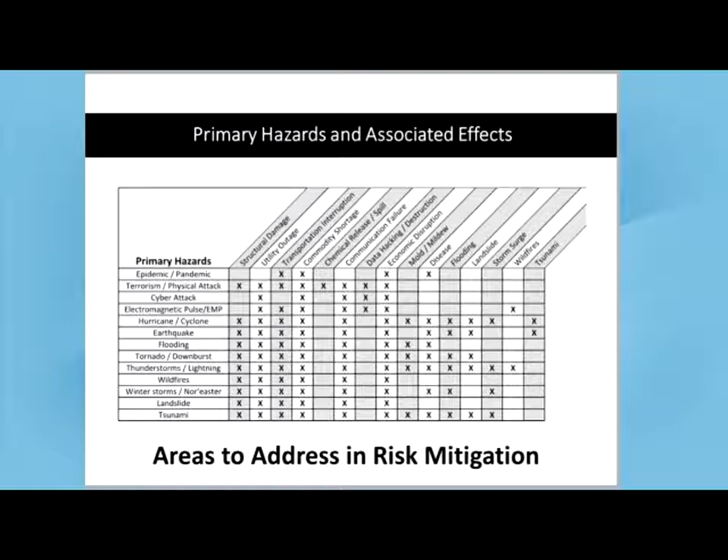This chart reflects a number of primary hazards, along with the multiple effects associated with same, as you can see across the top. Irrespective of the primary event, one can easily see that there's numerous effects to be considered, and thus addressed in resiliency planning and risk mitigation. They cover a broad gamut from physical destruction to utility interruption, environmental damage to economic disruption, data destruction to disease. Identifying and assessing these effects or risk is a critical part of any company's emergency program.

Let's briefly look at some specific incidents over the past few years. Currently, the entire nation, but especially the healthcare industry, is dealing with COVID-19. Before that, we had SARS, H1N1, Ebola, and AIDS. In early March of this year, Nashville experienced devastating tornadoes, with similar ones hitting Mississippi and Georgia last week, and even last night in Texas and Oklahoma. California deals with wildfires every year, including the notorious 2018 Camp wildfire. We understand that in today's political environment, with various religious and ethnic tensions, there exists a climate for terror attacks.

While we often hear of cyber attacks, numerous utility companies continue to report they have annual increases in their attacks on their control and SCADA systems. And finally, the Amtrak derailment in 2017, where a train was traveling at 80 miles per hour around a 30-mile-per-hour curve, reflected that even with supposed fail-safe mechanisms, there could still be tragic accidents, often causing loss of human lives.

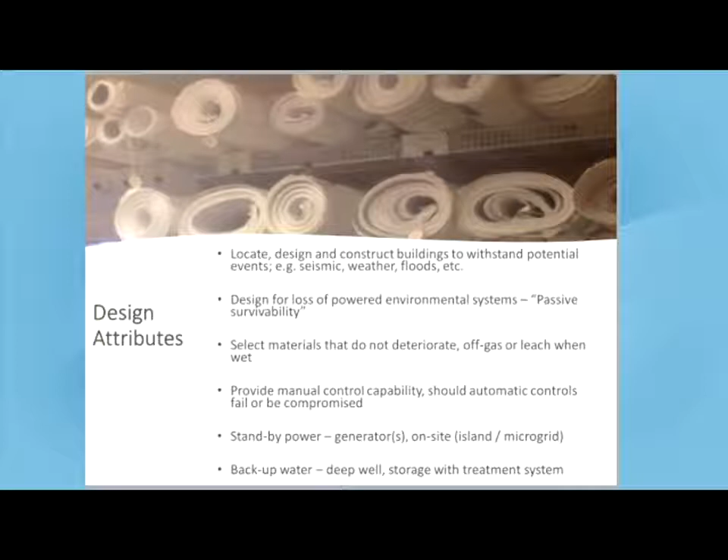Does one relocate to another facility or location, or plan to bring in a portable generator or fuel? And then finally, recovery mechanisms. Many utilities have developed restoration agreements whereby they share resources, materials, crews, etc. in times of severe events. And then finally, what is the required recovery time?

So GBCI offers four resilience rating systems in addition to the LEED system, which we're all familiar with.

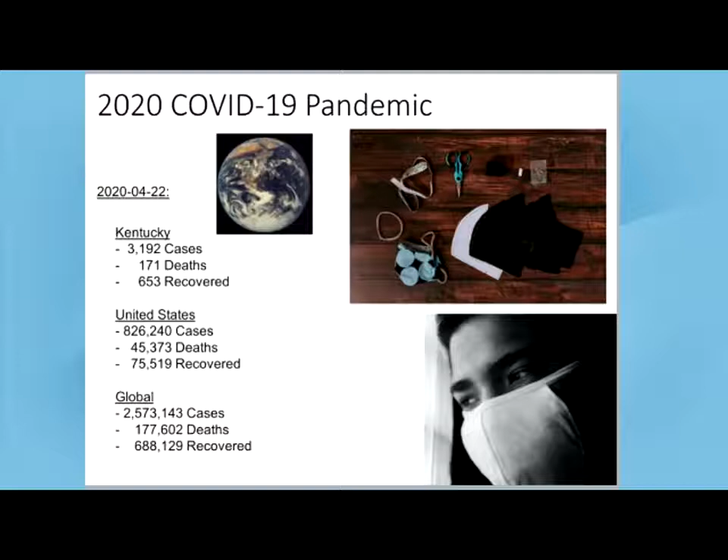While we monitor the news and the number of cases, we hear questions regarding lack of preparedness. Where were the stockpiles of masks and ventilators? How has this disrupted the supply chain, and what could have been done to anticipate this? The federal and state governments have appointed task forces to address logistics, but they're operating in a reactive mode. Where was the proactive planning?

We've been issued new rules under which to live and work. However, these have evolved over the last several weeks. Often, states' orders have varied, instituted and/or extended on different dates, but based upon what? Evolving information fed from what appears to be defective models and questionable data from countries around the world. Again, where was the upfront planning?

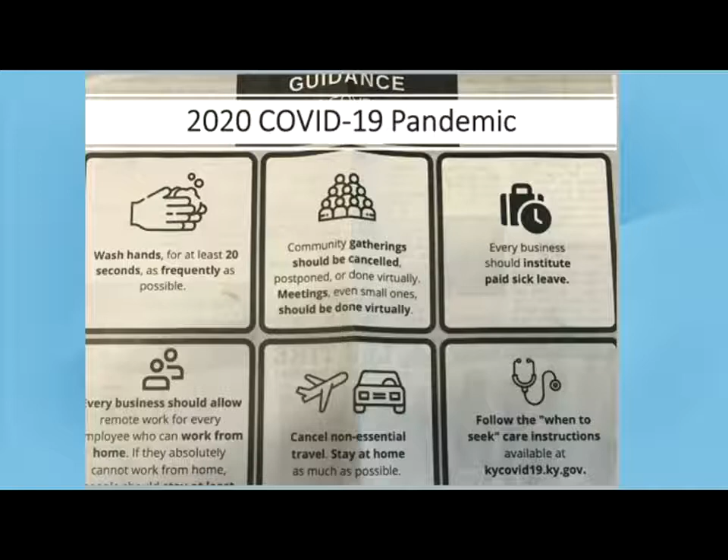Was a complete quarantine lockdown required for everyone? These are the questions that continue to be asked, and it appears to show a lack of resiliency, a lack of planning.

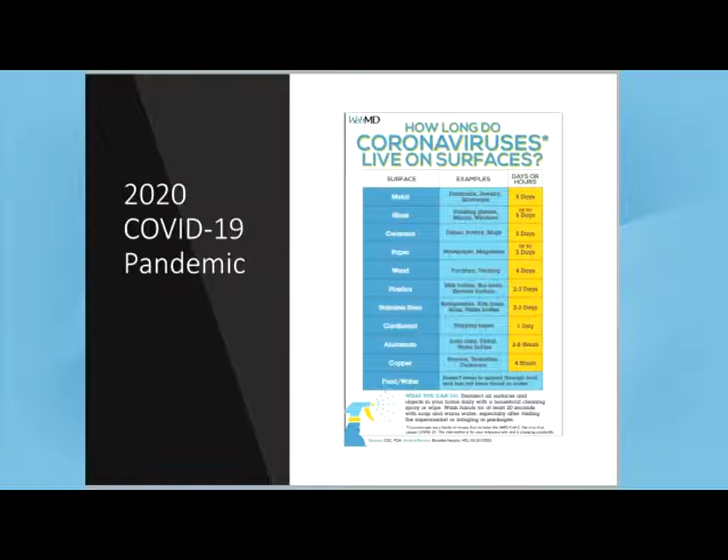We know that there are many stainless steel tables and equipment in healthcare being disinfected on a continuous basis. The chart also says it doesn't seem to spread through food or water, but what happens with respect to individuals touching packaging or produce at grocery stores? Again, a number of questions, and there are still people out there trying to answer some of these.

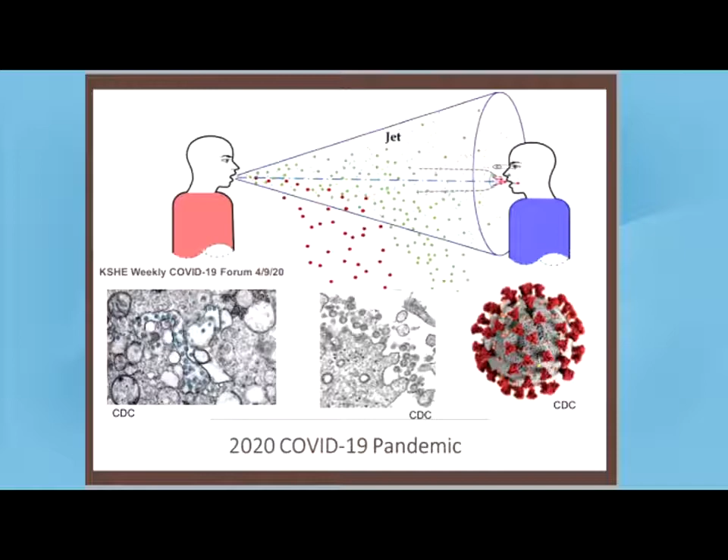Of course, Bob is showing the germ that we're trying to protect people from. One of the big tools in healthcare facilities is the 3M N95 mask, but an issue that has really arisen in the shortages and lack of previous stockpiling is the alarming number of counterfeit masks on the market.

These masks have authenticity numbers, and it's very important that hospitals have databases and the ability to use software to interconnect with the supply chain so that they can verify authenticity numbers.

This issue got even more complicated when the federal government reversed its decision due to supply shortages and are now allowing KN95 masks from China, which have an even larger set of counterfeit complexities and a greater need to look at authenticity numbers not only in the United States, but across the world.

This is why industrial platforms are crucial in helping to solve these problems. Stockpile allocation systems have been turned on their end with this issue. For example, in the state of Kentucky, we've had to migrate to the WebEOC software in order to keep up with the demands of allocating resources effectively.

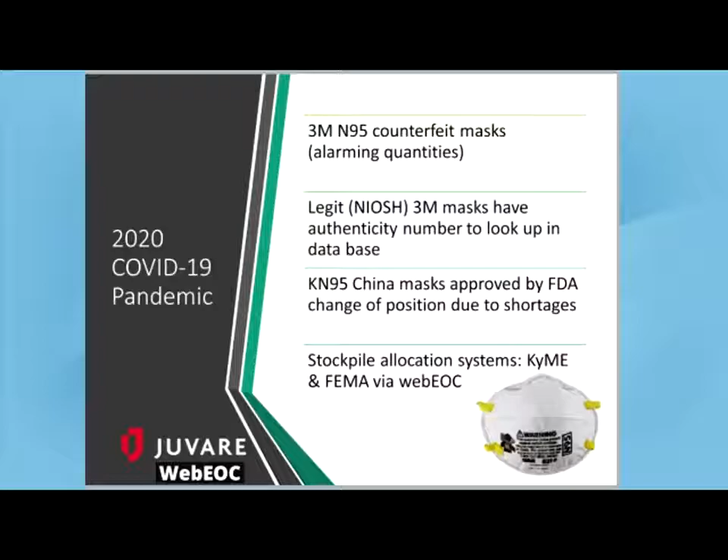There's been a lot of ingenuity associated with the COVID case and a lot of hard work by engineers. At Johns Hopkins, they developed 3D printed splitters in case ventilators needed to be shared between patients, which hasn't really come to. In the early days of this COVID-19 crisis, Smith Seckman Reid, an ACG member, put a one-page checklist into the hands of hospitals in Kentucky and other states.

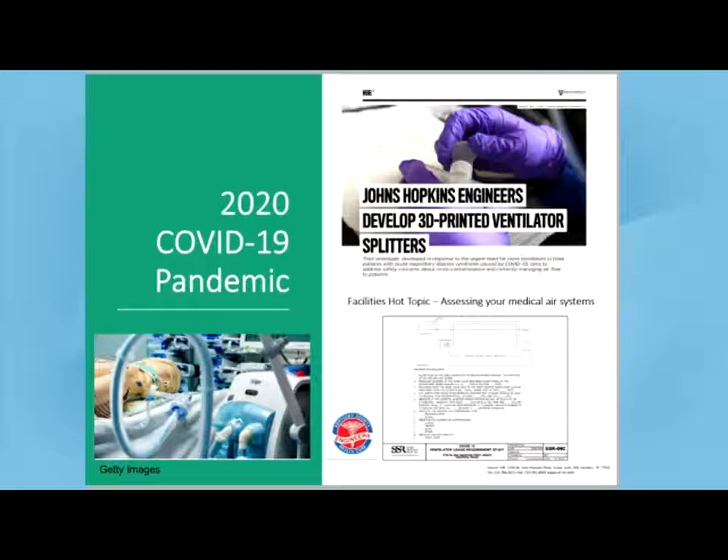This checklist really helped them to assess their medical air system, because it's one thing to buy or supply ventilators, and another thing to have the medical air systems on your head wall that can support them.

Surge planning is extremely important when you talk about medical gas systems and ventilators. Do you have the fittings on hand to accommodate new equipment? Do you have the bulk oxygen supply zones understood to where you can pick zones closer to the supply with the largest pipe sizes and the shortest pipe runs?

Each ventilator has its own continuous flow requirements and lowest operating pressures, and this is incredibly important to know so that you don't overtax your system.

Mainline pressures are normally set at a 55 PSI max, but with added ventilators, we've had to work at the max, which causes a lot of nuisance alarms. So alarms are recommended to be set 20% high at about 66 PSIG in order to prevent so many of these nuisance alarms.

You need to do hour-by-hour monitoring of these medical gas systems because the vaporizers can freeze when they're running a lot of volume, and you might have to put fans outdoors to try to get some of that icing off the equipment. Bulk oxygen tank and evaporator capacity could really be the weak link.

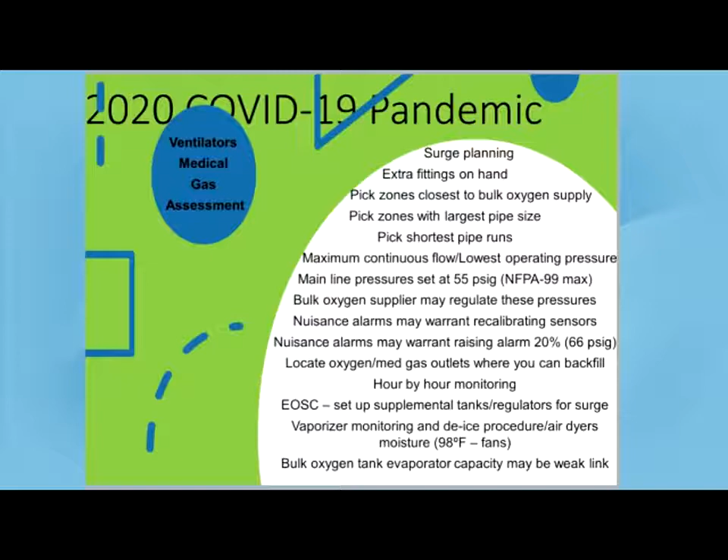Filters are another issue. I think the number one thing to understand is air exchange rates are the greatest HVAC tool in order to prevent infection, and that's basically 6 to 12 air changes per hour to be effective.

Fortunately, the viruses are suspended in mucus, which catches about 90% of the problem, but that still leaves 10%. So you have to use strategies.

One of the things is that we're needing more isolation rooms, so we're bringing in air cleaning machines with HEPA filters so that we're not discharging virus-laden air directly into the atmosphere.

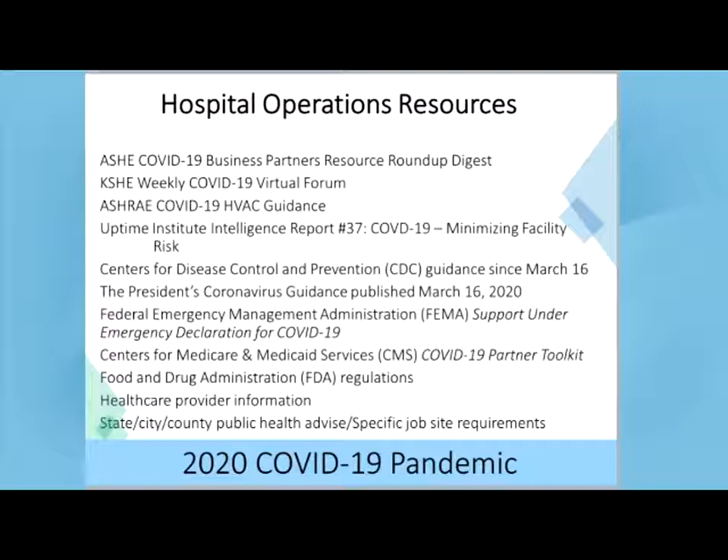There are a lot of resources out there. This is a list, and when the slides get published, you'll have access to it too. Through KSHE and other associations, we've been looking at all these different resources to try to support our clients in healthcare, pharmaceutical, and data center industries.

The American Society of Heating, Refrigerating and Air-Conditioning Engineers, ASHRAE, created a site with a variety of resources for COVID-19. These include interim guidance from the CDC, guidance from the World Health Organization, and lists of various ASHRAE standards, guidelines, and position documents.

Their current recommendations include disabling demand control ventilation and increasing outdoor air ventilation within the constraints of temperature control and ambient air pollution. Additional recommendations include sealing the edge of filter racks and upgrading filtration. They also recommend operating HVAC systems 24/7 and considering the use of UV lights coupled with filtration.

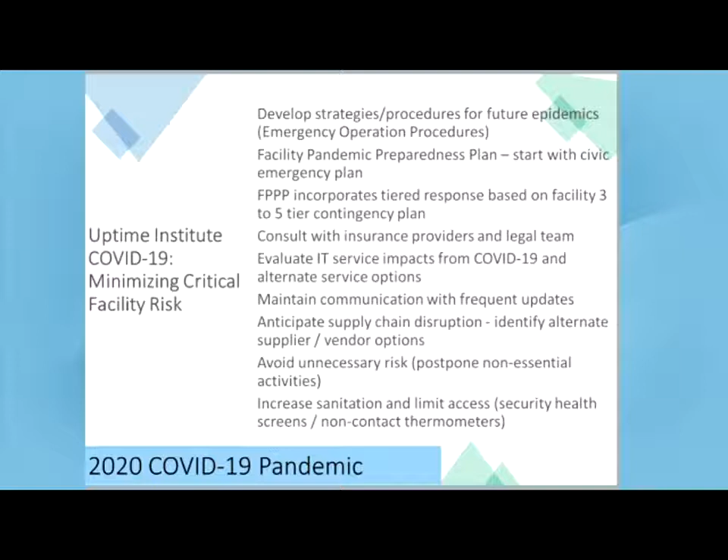Understanding the critical nature of communication and data access for all mission critical facilities, including both healthcare and first responding agencies, the Uptime Institute recommends that its members test their networks to confirm the higher volume expected with numerous personnel working remotely and connecting through VPNs.

They also recommend any unnecessary maintenance or construction projects be temporarily postponed to avoid potential interruptions of service. One of the issues that appears to make data centers a little bit more vulnerable rests with the average age of the operating workforce, which in many cases exceeds 50 years of age.

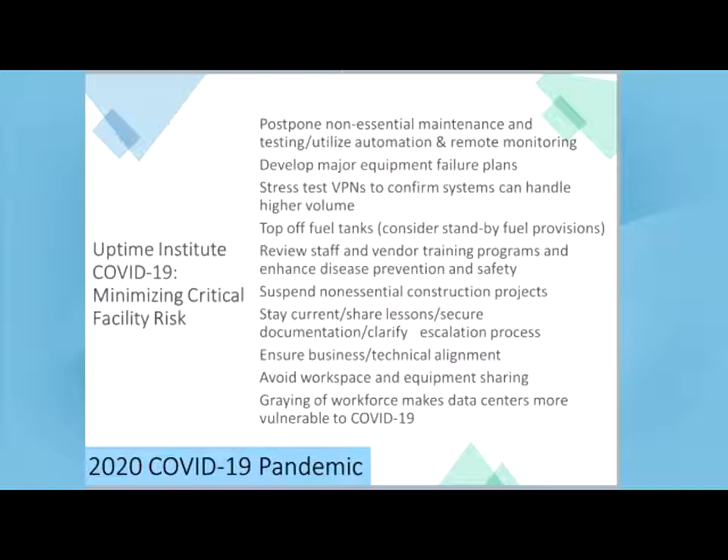In discussing resiliency metrics, the Uptime Institute, quite a while back, developed a series of 4 tier levels to rank data centers based upon their reliability and resiliency. These examine potential single points of failure, annual downtime caused by the site, and thus the representative site availability.

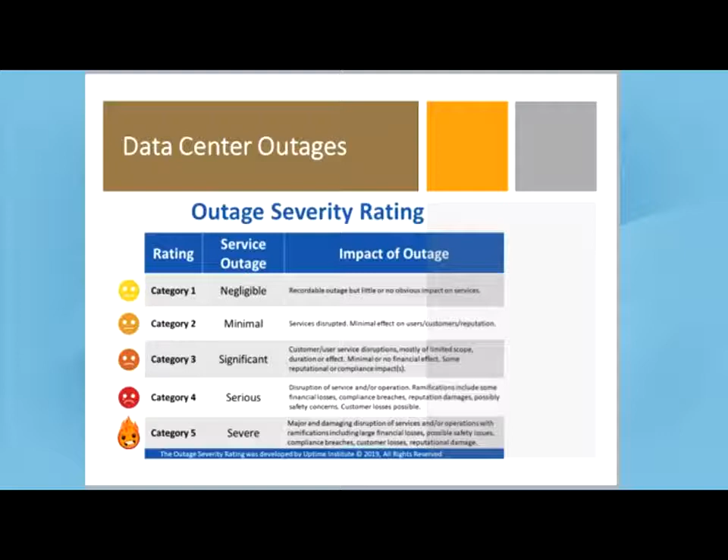Similarly, the Uptime Institute has developed a 5-category rating for the severity of service outages, rating them from negligible to severe based upon a number of factors, including financial effect, losses, reputation concerns, safety issues, and losses of customer data. Naturally, these disruptions have numerous consequences related to healthcare information, first responder information, and most importantly, online commerce.

More specifically, to reflect the economic numbers, Amazon Web Services had several outages in their Virginia data centers back in 2018 between March and June, including approximately a 6-hour outage during their annual Amazon Prime event.

With the increase in number, size, and complexity of new data centers, many serving the cloud, the number and average duration of outages has been increasing annually. Last year, the average cost of a data center incident was about $750,000, or roughly $11,000 per minute. The maximum outage cost could be millions of dollars.

This has only increased during this pandemic, when I hear recently that Amazon revenue numbers are in the range of $11,000 to $15,000 per second.

Another important aspect of our society is the cold chain. We need to avoid food spoilage and protect the food supply of our country. Resilience plays an important role in this, and this is also an area where we can see that resilience can be combined with normal operation. So it's not just a matter of outage, but it's also a matter of stability of your operating system.

We want to maintain the security of the food system from loss of power, from equipment malfunctions, which could include things like compressors, condensers, fans, pumps, electrical devices, and controls, as well as natural disasters. One of the big developments, and it has a lot to do with material property development, is the advent of thermal energy storage, which improves efficiency, minimizes fluctuation, and extends protection.

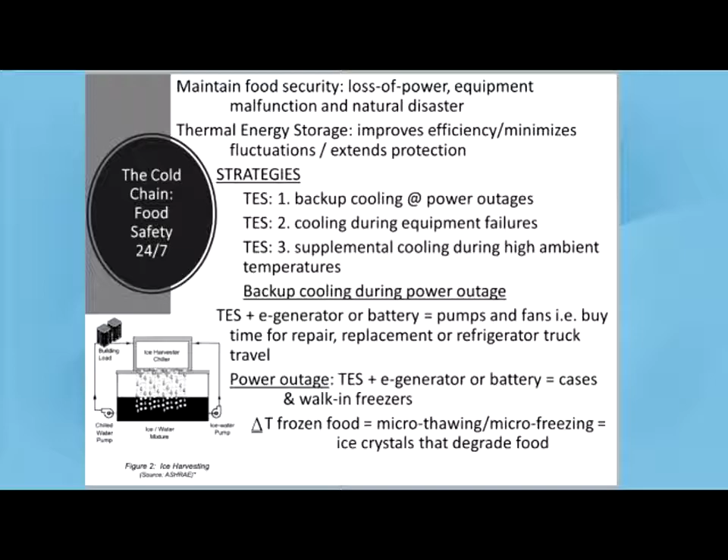Stability is key in this industry because frozen food is affected by fluctuations in temperature, which causes microthawing of the freezing particles, and those large ice crystals degrade the food, which is obviously not desired.

Thermal energy storage systems use latent heat and are 50 to 85% efficient. They consolidate heat near the top of a room where the refrigeration airflow occurs. There's also a strategy in the cold chain of shifting compressor runtime to nighttime.

25% less energy and improved temperature stability are known from applying thermal energy storage systems. We can combine this with phase change materials, intelligent controls, and load shifting and demand response to provide resilient, reliable, and normal operations.

I should point out too that the cold chain is crucial in maintaining our medical supplies. For example, vaccines typically have to be refrigerated. So resilience and reliability in the cold chain is extremely important.

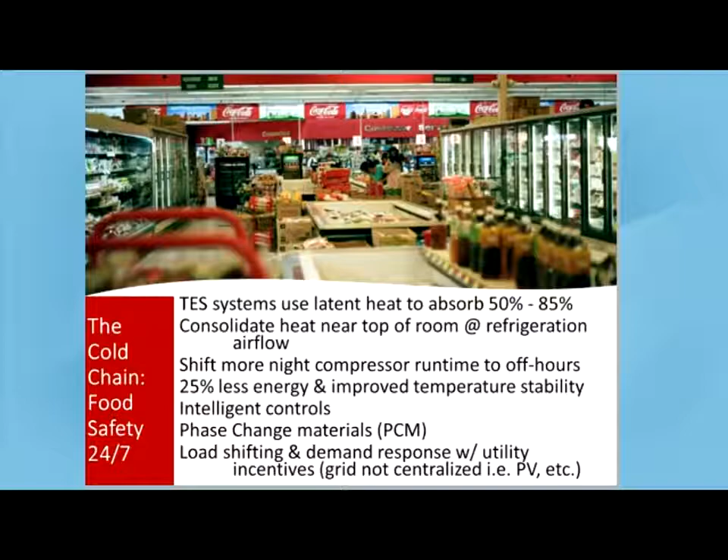When Bob and I conceived this presentation last year, my motivation was the Boeing 737 MAX. We saw the crashes that occurred that caused a lot of loss of human life. In fact, a total of 346 died in 2 crashes.

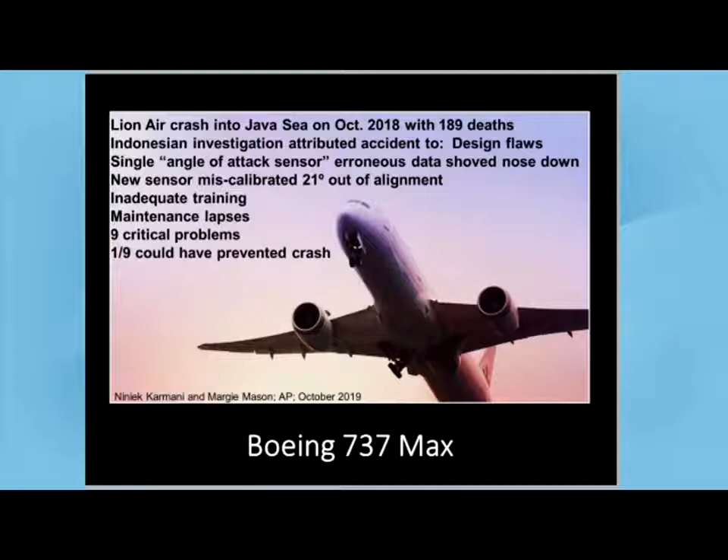There was the Lion Air crash over the Java Sea in 2018, and the Indonesian investigation attributed the accident to design flaws—a single angle of attack sensor reporting erroneous data shoved the nose downward and caused a 21-degree misalignment that contributed to the death. This was done at a maintenance operation prior to that flight, and it reflected inadequate training and maintenance lapses. Investigators said there were 9 critical problems, any one of which could have prevented the tragedy.

In March of 2019, this came to a head when a second plane crashed in the same way. That was the Ethiopian airliner that killed 157 people. The Ethiopian interim investigation report again cited design flaws.

They noted the unstable adjustable stabilizer and that the controlling software had flaws in it, and that those flaws were not relayed to the operations people—they were omitted in the O&M manuals. The rollout of controls to solve a mechanical problem in an aircraft provided a single solution with no real resilience, which led to tragedy.

The U.S. Committee on Transportation and Infrastructure cited that production pressures, a culture of concealment, and safety certification process irregularities were direct contributors to these tragedies.

Moving to a more pleasant subject, community-based resiliency at Alys Beach. There is a home program called Fortified that is considered the national standard for resilient construction, and it deals with homes in coastal regions affected by rising sea levels and floods and so forth.

The key is that there are first and second order environmental disaster impacts. First order are the obvious loss of life, displacement of people that comes from the immediate after-effect, and then the need for construction. But the second order impacts are also life-threatening in that they shut down social systems and make it hard to get healthcare providers where they need to go. It can close down businesses and devastate infrastructure.

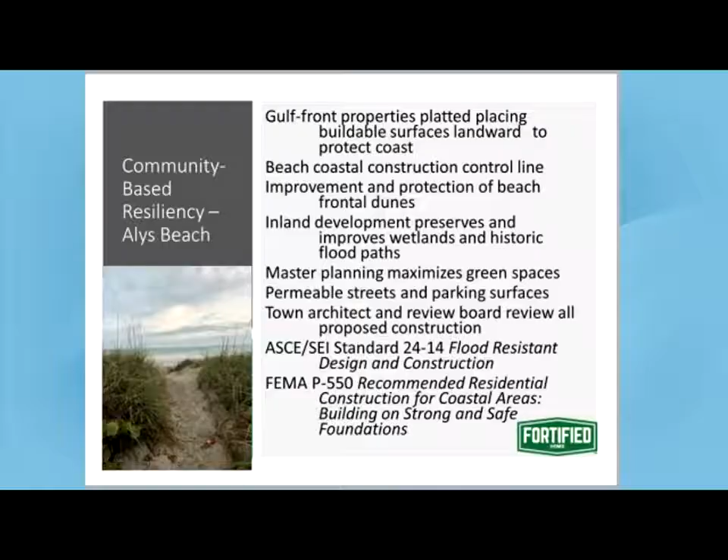Another thing that comes to light in this is severe duty louvers to improve resilience. Think of this in terms of hurricane prone areas like Florida, or anywhere on the coastlines of the country. These are heavy duty louvers that can resist high wind forces. They can also withstand hard impacts like missiles hitting them, big objects like bricks or pieces of wood.

Severe duty louvers also need to be considered in areas that aren't necessarily coastal. We had a project in Western Kentucky, in the middle of the state, where after turning the building over we were called back because there was ductwork collapse. The assumption was that a failure of the commissioning process led to a shut damper, but we went and retested and everything was working perfectly.

What we discovered was we had a minimum outside air intake on one corner of the building, and at a 90-degree angle was the main outside air intake. When we were economizing with the unit, a storm came, and that storm caused a pressure differential on the corner, and it imploded the entire ductwork for the return air system. This is a good example of considering resilience ahead of time when you know you're in an area susceptible to high storms and winds.

Getting back to facilities in general, and speaking about ASHRAE, they've taken a very proactive approach to resiliency in the design of their new global headquarters. A number of potential resilient measures were identified during development of the project's owner's project requirements, or current facility requirements, and were ranked as low, moderate, or high with respect to cost. Features listed here include passive survivability in case of a power outage to the environmental systems, standby generator, battery backup systems, impact-resistant windows, backup communications, and even redundant water supplies — again, a proactive approach for resiliency up front in the planning of this facility.

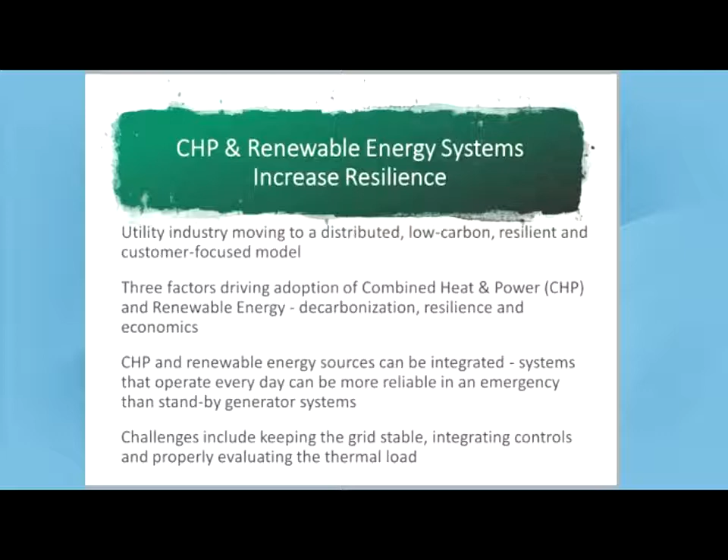As previously discussed, healthcare facilities, especially hospitals, have a high need for reliable and resilient power. These are especially good candidates for CHP and fuel cell systems, both of which provide electric and thermal energy. CHP, fuel cell, and even renewable energy systems, which operate year-round, are viewed as more reliable than standby generators, which may only be exercised periodically and only run during emergencies. Fuel cells convert chemical energy from hydrogen-rich fuels to electric power and heat. These can both use natural gas or clean renewable biogas, and both systems are seen as reducing emissions and enhancing environmental sustainability.

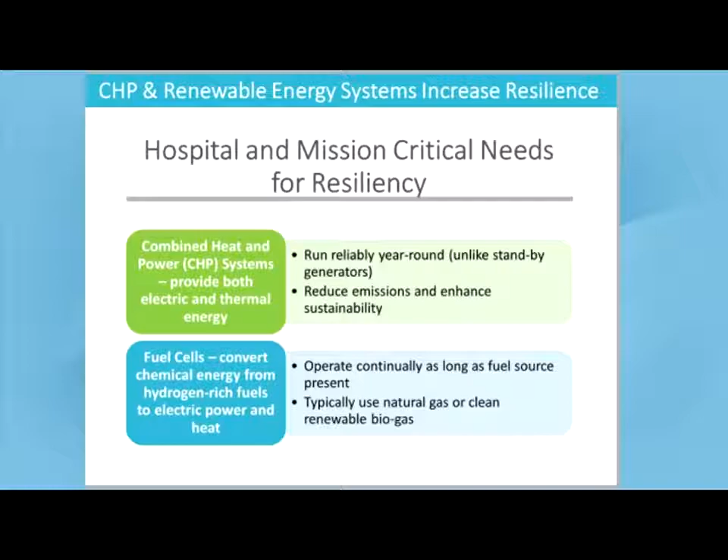Retrofits should also be considered in terms of resilience. These facts are very critical at this time, and I know our leaders, both at the state and federal level, are aware that 40 to 60% of small businesses never reopen following disasters. That's a devastating statistic, as is the fact that 90% of small businesses fail within one year if they don't reopen within 5 days after a disaster. Keeping buildings open is a prime resilience strategy to spur bounce back of the economy and social structures in communities. Retrofits can address energy efficiency and resilience as co-benefits, as I mentioned in connection with the cold chain discussion.

A good code, of course, is the International Energy Conservation Code. On-site electrical generators, CHP, as Bob mentioned, photovoltaic — all these types of systems can be added in retrofit renovation projects to increase resilience. So we need to reduce complete reliance on the energy grid and figure out how we can accomplish passive survivability.

If a facility is undergoing a power change, can we maintain thermal comfort, lighting, communications, water, and sewer? We prioritize life safety, and maybe maintain the ranges a little wider, but what can be done when you're doing renovation projects? Strategies to mitigate heat gain or loss in the building, something as simple as adding insulation. In New York City, when a high rise goes down in the middle of summer, it's been documented that it can get to 120 degrees within something like 3 hours in the middle of the day.

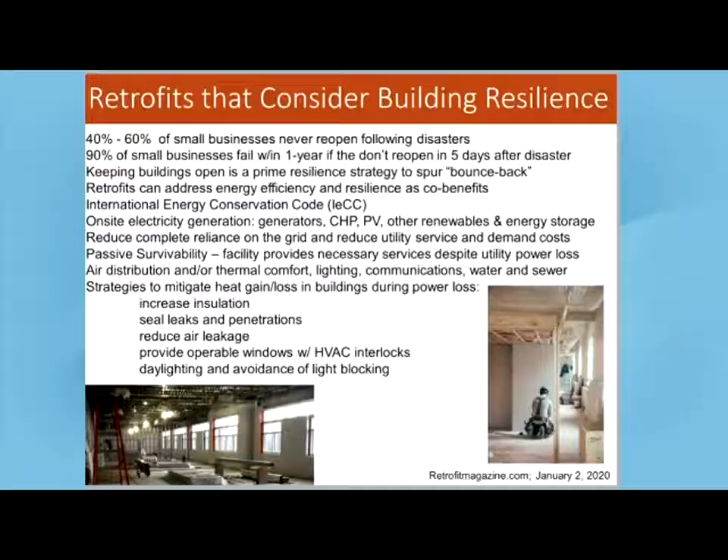In terms of the bad example, PG&E wired to fail in California. Bob already mentioned the Camp Fire that was devastating. That was only one of four PG&E-sparked fires that day, the 408th fire that PG&E power lines sparked that year. But the Camp Fire deaths are not all on PG&E, and neither are all the fires.

There's plenty of development issues that led to trouble. The 1,961 wildfires sparked by PG&E since 2014 attest to the fact that 15 years of bankruptcies have caused deferred maintenance on their electric lines and gas pipelines. We saw the 2010 San Bruno explosion of a gas pipeline that killed 8 people, injured dozens, destroyed 38 homes, and it was the result of an uninspected 1956 weld.

Also, the government imposing green energy mandates on the electrical utility company, raising them from 10% to 33%, resulted in deferred maintenance on their infrastructure, which led to some of these exacerbating tragedies. The old saying for PG&E, their motto was, PG&E is committed to protecting our customers' privacy.

You can look on their site now and you'll find out that's changed. They're now committed to protecting their customers' safety. Outsourcing of pipelines, leak detection, and damage control were the leading cause of violations from regulators for PG&E.

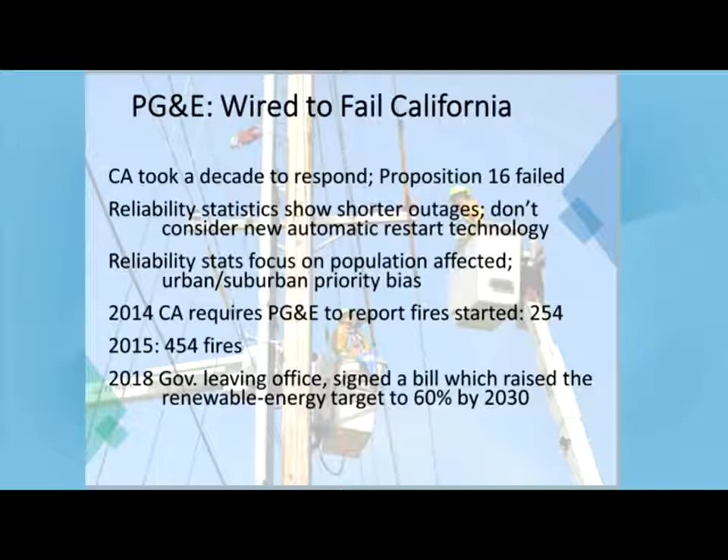To compound things, in 2018, shortly before leaving office, the governor of California reset the target for renewable energy to 60% by 2030. It's not a bad concept, but the cost in terms of deferred maintenance and potential tragic loss of life due to lack of resilience also needs to be taken into account.

Another single-minded thing was the 5G rollout. The Sprint and T-Mobile merger really focused on the fact that the market was betting on a fast 5G rollout. Samsung put out 3 phones, and Apple's going to have their first 5G phone in the fall of this year. So carriers have to build out these 5G systems sufficiently to attract more customers, and they're starting to see a lot of pushback right now.

South Korea was the first 5G deployed market, and now their consumers are complaining that they're not getting the reliability and speeds they were wanting, because proximity is key to 5G availability, and the build out is just not matching the demand for these services.

More base stations, relays, and antennas than traditional infrastructure will result in massive build outs that tear up cities, and there's a lot of pushback both in Korea and in the United States. Ericsson reported that higher 5G related costs are causing slowdowns in North America and Asia.

An interesting connection here is that South Korea is one of the most effective countries at combating the COVID virus. One way they did that was their 5G build out was complete enough to install infrared sensors and detect temperatures of people in public, isolating them quicker than a lot of other countries. We're talking about using drones in this country too, but of course we also have privacy issues and other concerns with that.